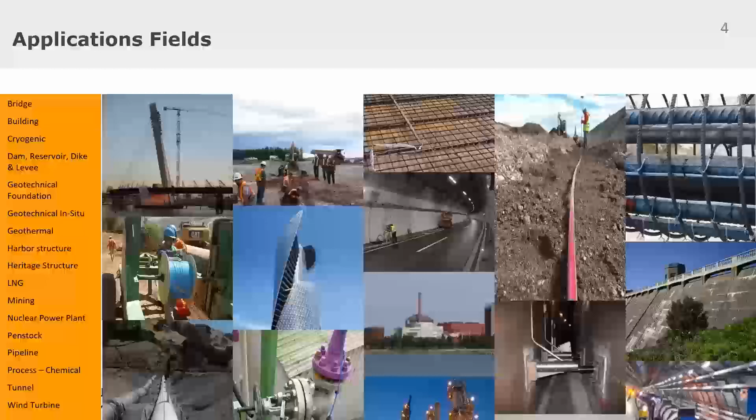Thank you, Olivier, thank you for your introduction. Okay, so let's start with a very brief introduction on structural health monitoring, instrumentation, and sensors.

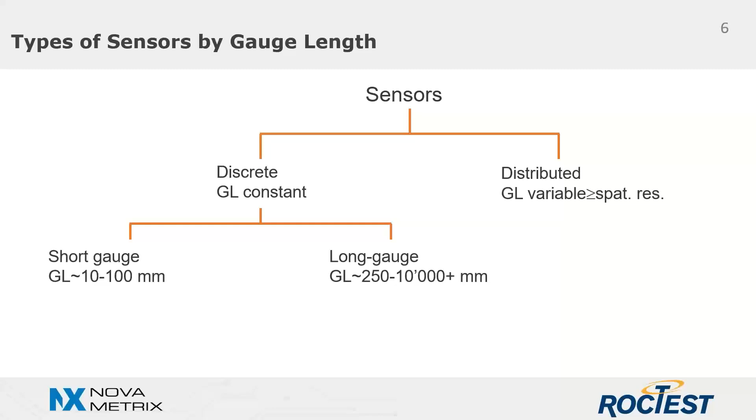So here we can see the types of sensors by gauge length. Sensors are classified as discrete sensors with constant gauge length, and distributed sensors with variable gauge length, which are typically based on distributed fiber optic sensing. Discrete sensors are divided between short gauge, with a typical length from 10 to 100 millimeters, and long gauge deformation sensors, with a length from 25 centimeters to 10 meters.

Distributed sensors can be based on Brillouin scattering technology for strain and temperature analysis along the fiber, Raman scattering technology for temperature only, and finally Rayleigh scattering for acoustic analysis along the optical fiber.

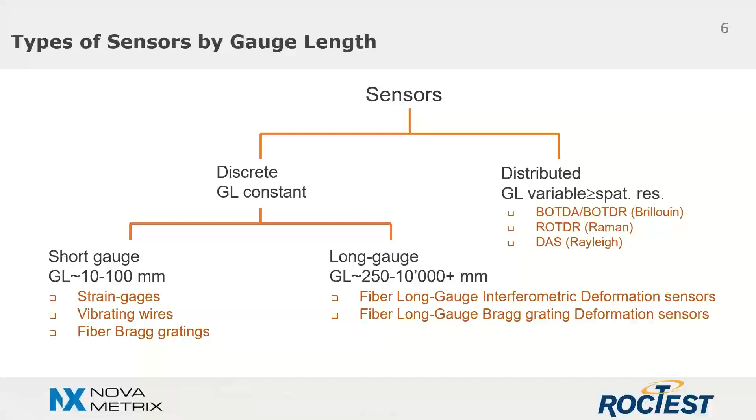Long gauge deformation sensors, all fiber optic, are based on the interferometric principle or Bragg grating, while short gauge sensors are typically electrical strain gauges, vibrating wires, and also fiber optic Bragg gratings and Fabry-Perot cavity sensors.

So here we can see the different long gauge deformation sensor topologies. On the left, we see a simple topology, which consists of one single sensor installed in the direction of the expected strain. It is mainly used for monitoring linear structure elements like beams, which are subject to axial compression or traction, like, for example, piles and columns.

Here in the center, we can see a parallel topology, which consists of two parallel sensors with equal gauge length, installed at different levels of the structural element cross-section. The parallel topology is used for monitoring portions of the structure which are subject to bending.

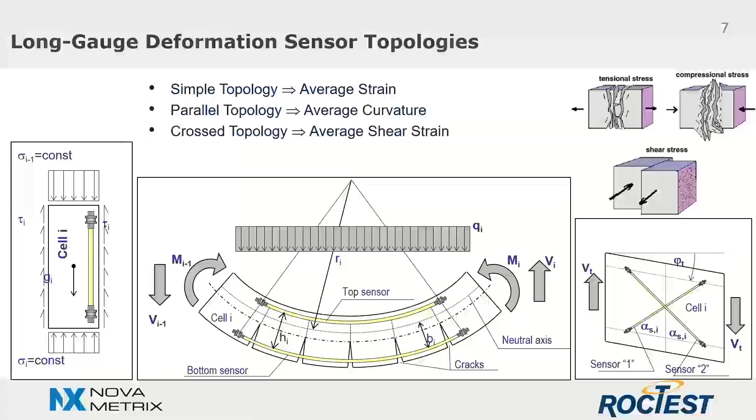Here on the right, we can see the cross topology, which consists of two cross sensors installed with a predefined angle with respect to the direction of the strain line. The aim of this topology is to detect and quantify shear strain.

The main advantage of using long gauge deformation sensors is given by the averaging of the strain over a long measurement basis. Long gauge sensors are not influenced by local material discontinuities, such as cracks, joints, air pockets, and inclusions that are typical of concrete. The measurements contain information related to the global structural behavior, not the local material behavior typically provided by short gauge sensors. The information provided with long gauge sensors is therefore more representative of the global condition of the entire structure.

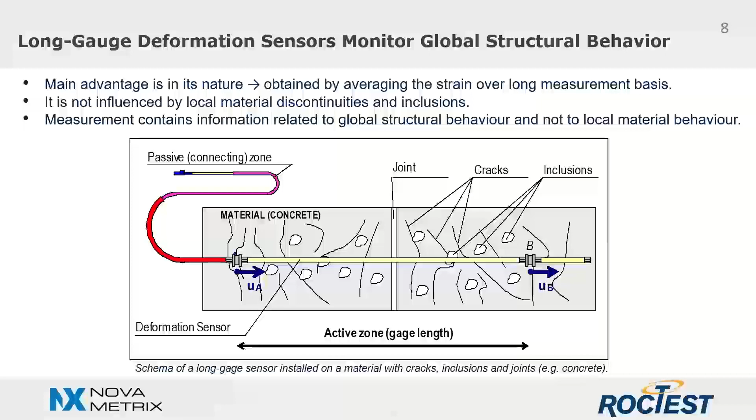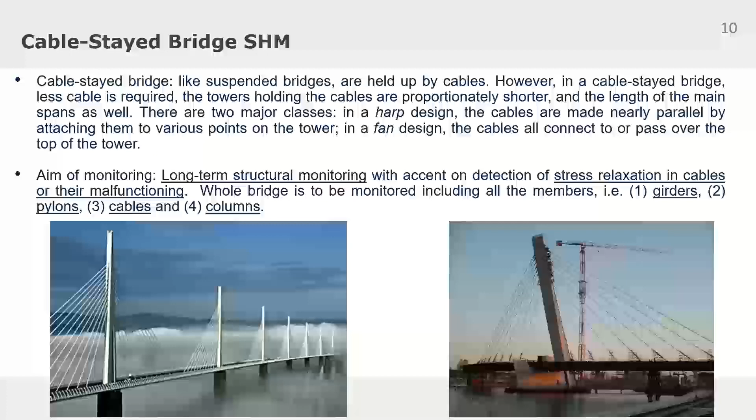Now let me give you a few bridge monitoring examples by bridge topology, and we can start with a cable-stayed bridge. The monitoring purpose for cable-stayed bridges is long-term structural monitoring, with particular attention on detecting relaxation of stress in the cables and their malfunction. The entire bridge is to be monitored, including all members such as the girders, the pylons, cables, and columns.

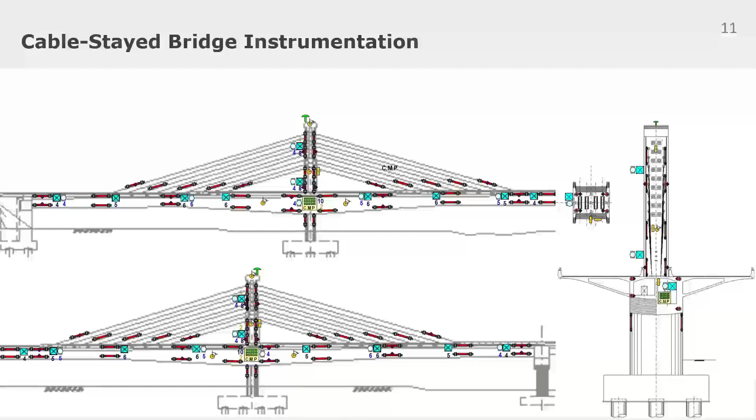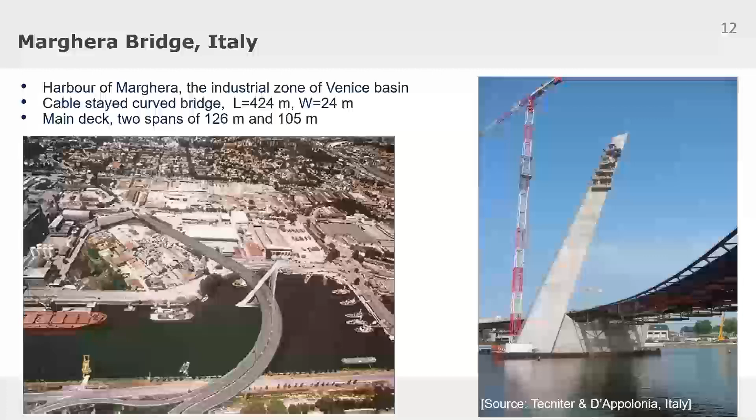Okay, here we have an example of a cable stayed bridge. This is the Marghera cable stayed bridge, located in the industrial area of Venice in Italy. The structure consists of 2 spans with a total length of 424 meters, and this bridge has the particularity of being a curved cable stayed bridge, which resulted in a complex design, and the monitoring system was very important to verify the design assumptions and also to monitor during the entire service life.

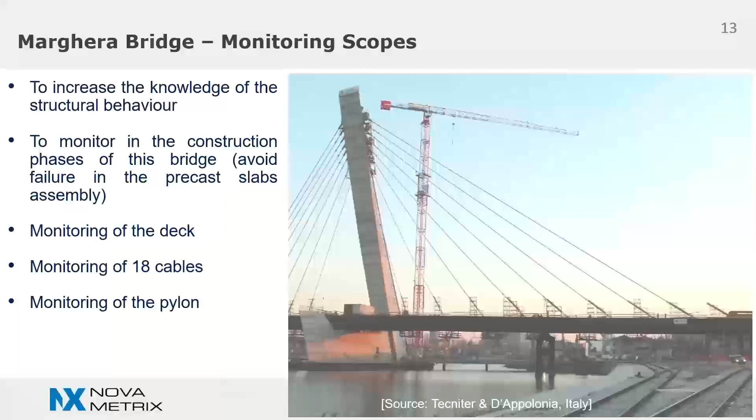So the sensors were installed during construction in order to have control over the most significant construction phases of the bridge, and totally 48 long gauge sensors, together with 4 inclinometers and 24 temperature sensors, were mounted on the 2 spans of the bridge. Each of the 18 cables was instrumented with a sensor, and the 12 sensors of 7-meter gauge length were embedded in the pylon.

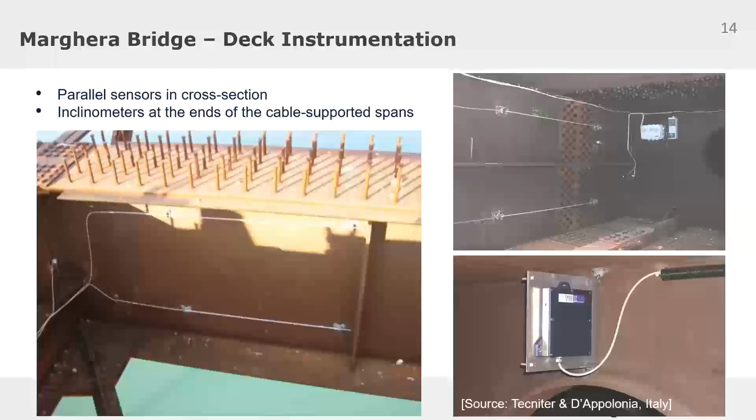Here we can see parallel sensors affixed onto the girder web, and the inclinometers were installed at the ends of the spans to measure rotations in the longitudinal plane of the bridge.

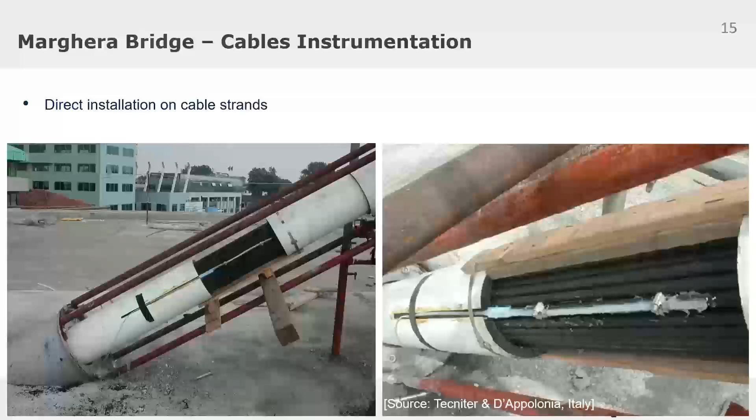Here the deformation sensor of base length 25 centimeters was installed on the strand of each stay cable to monitor strain variation of each cable and to detect anomalies that may indicate malfunction. The sensors were easily affixed directly on the strand using steel clamps, and the protecting coating was restored after sensor installation.

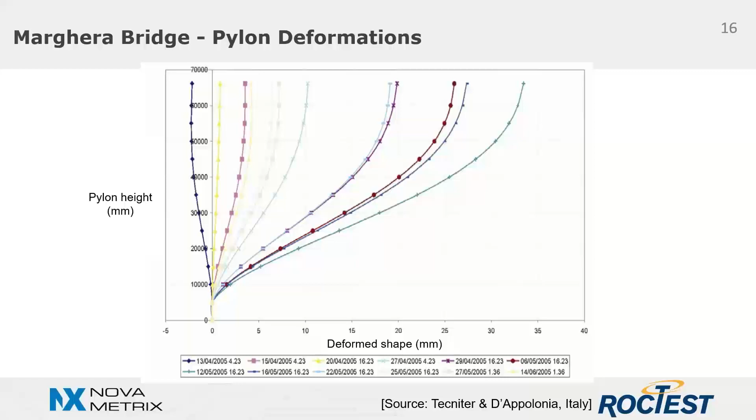For information, the total cost of the monitoring system of this bridge, including installation, was of the order of 1.75% of the total construction cost of the bridge.

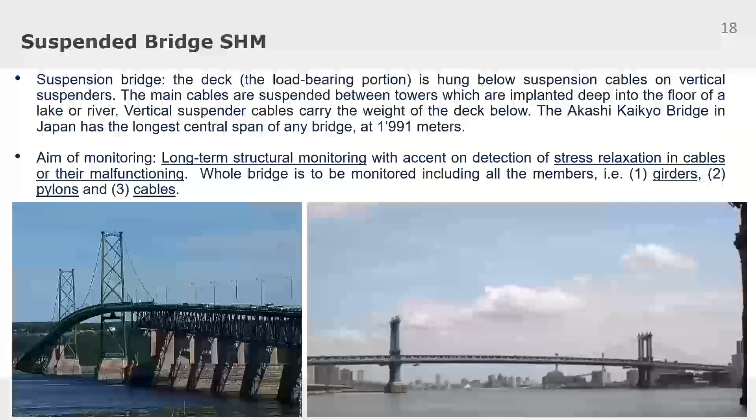Okay, let's see now another bridge, the suspended bridge. The monitoring aim of suspended bridges is still long-term structural monitoring, but with particular attention on the detection of stress relaxation in cables and their malfunction. So the whole bridge is to be monitored, including all members like the deck, the pylons, and the cables.

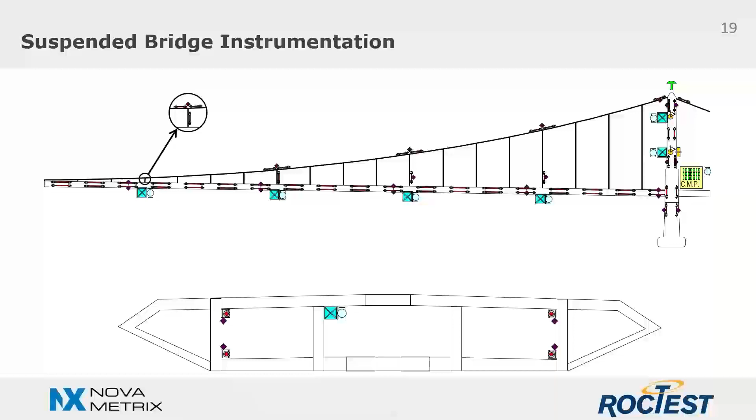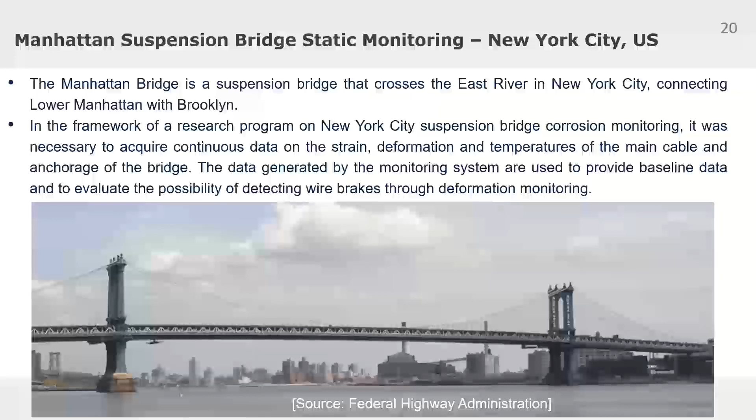Right, this is an example of a suspension bridge: the Manhattan Bridge in New York. This monitoring project came up in the framework of a research program on the corrosion monitoring of suspension bridges in New York City. It was necessary to acquire continuous data on the strain and temperatures of the main cable and provide a baseline to evaluate the possibility of wire breakage.

So 6 long gauge deformation sensors of 6 meters were installed on the main cable, and 2 Bragg grating strain sensors were installed on the anchors on individual strands.

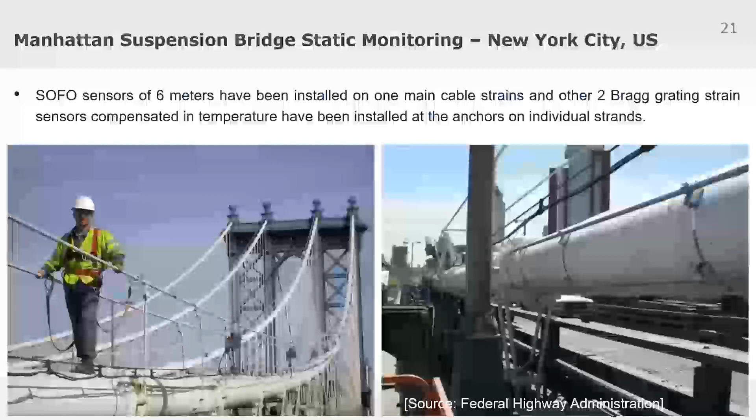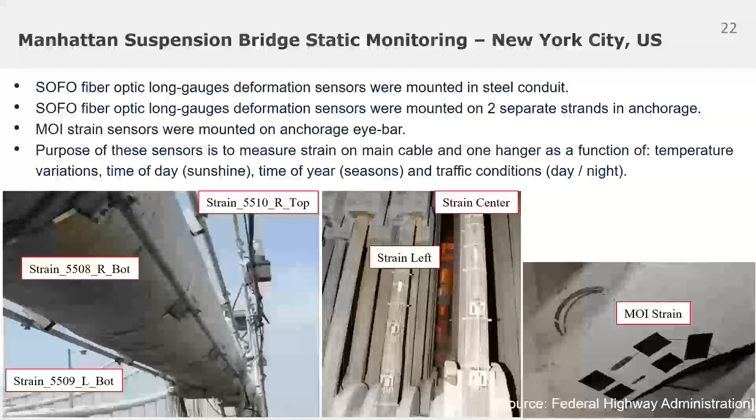The purpose of these sensors is to measure strain on the main cable and on one hanger as a function of temperature variations, daily and seasonal variations, and traffic conditions.

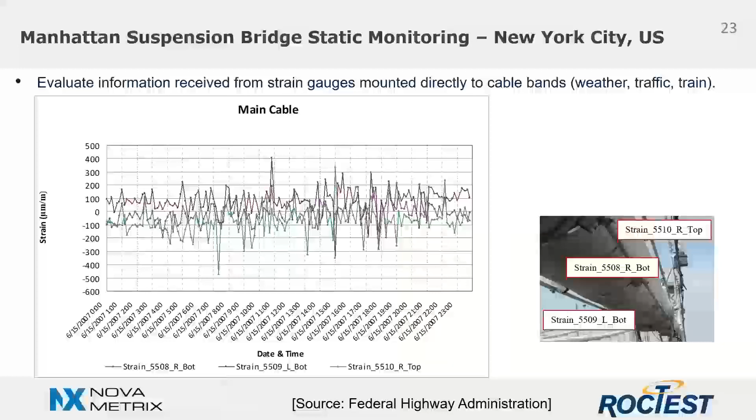Here we can see the strain evolution versus time of the 3 sensors mounted on the suspended cable. What you can notice is that the stress generated on the cable is less during the night and increases during the day, and the peaks we see here are most likely heavy trucks detected when passing over the bridge.

Now we can see another type of bridge, the arch bridge. The monitoring purpose is again the whole lifespan monitoring, including the concrete early age and all the critical phases of the construction of the bridge.

The load test of the bridge also has to be monitored, and during service, any change in the deformed shape of the arch due to load or due to rheologic phenomena like creep, concrete shrinkage, and cracking also have to be controlled and monitored.

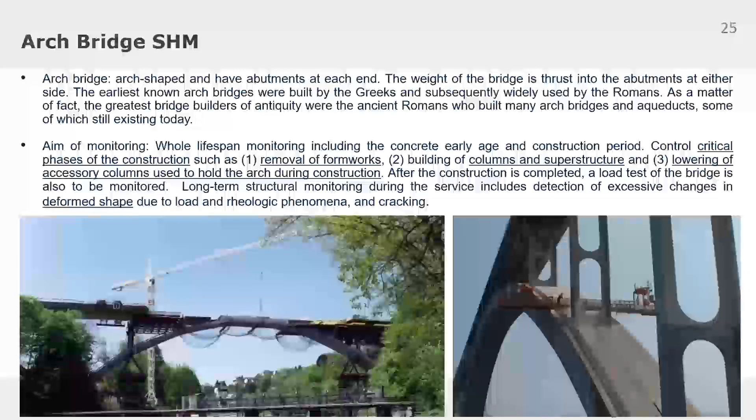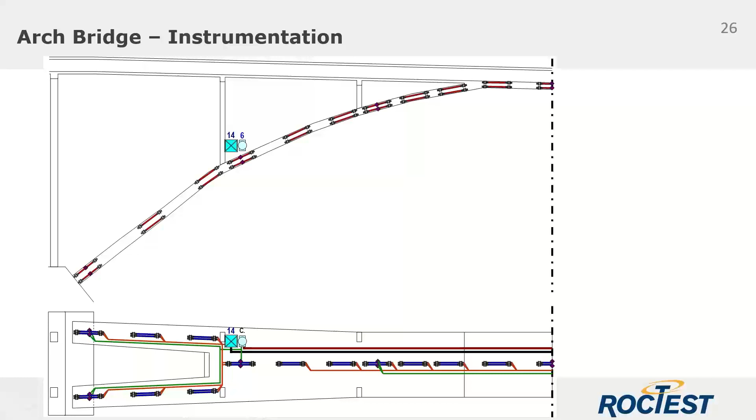Here we can see the same instrumentation on the other part of the bridge.

Here is an example of an arch bridge: the Siggenthal bridge, a concrete arch bridge built over the Limmat River close to Zurich in Switzerland. Structural monitoring has been carried out since the completion of the construction of the bridge, but in particular during the different construction phases.

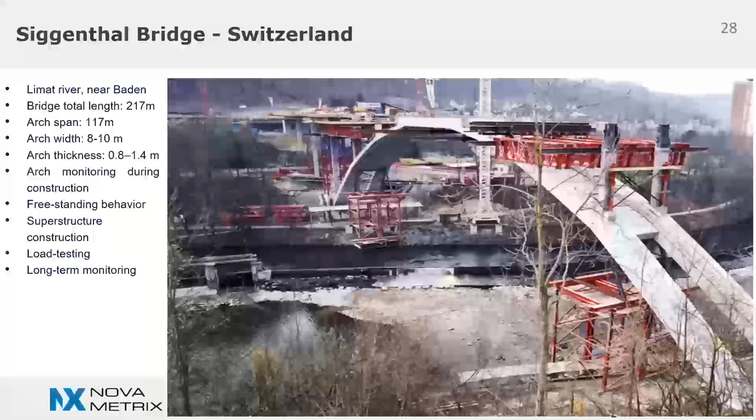The monitoring aim at the time of construction was to monitor the local concrete deformations, to measure the local curvatures in the vertical plane, and to calculate the perpendicular displacement of the arch by double integration of the given curvature in each cell of parallel sensor that you can see here.

The method for how to calculate the deformed shape of a beam.

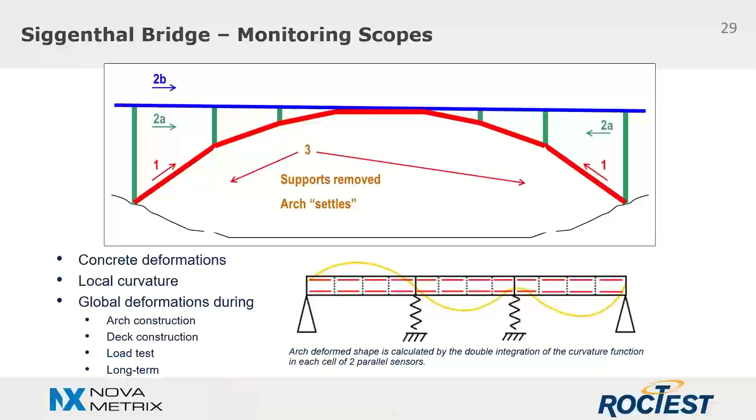The bridge is now instrumented with 58 long gauge deformation sensors, 2 inclinometers, and 8 temperature sensors. Pairs of parallel sensors were embedded in concrete parallel to the arch axis, which is a usual methodology.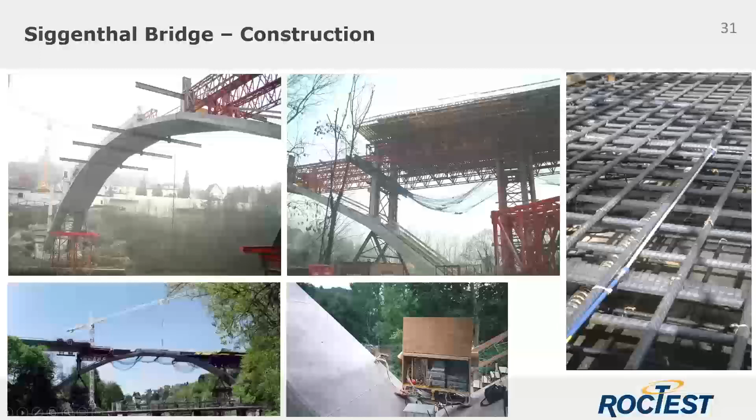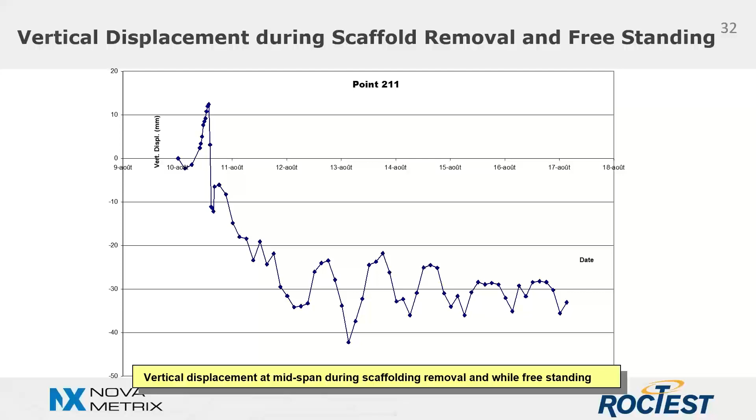Here it is also possible to see the different lowering phases and the periodic movement due to daily temperature variations. It's also interesting to notice that the vertical displacements due to the dead load of the arch are of the same order of magnitude as the daily movements due to daily temperature variations.

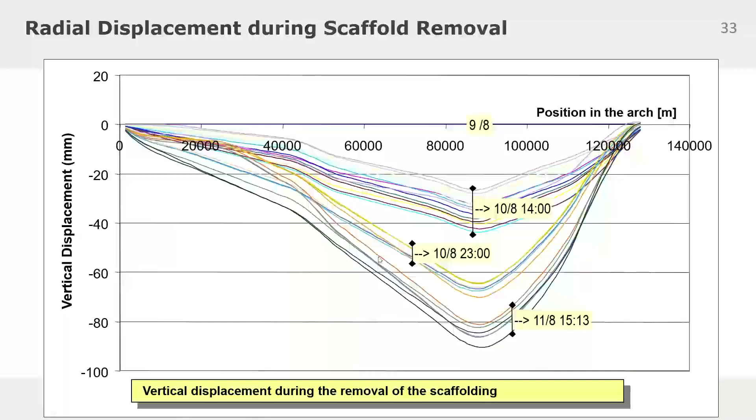Now, finally, this is the last example, the beam bridge, which is a more simple bridge.

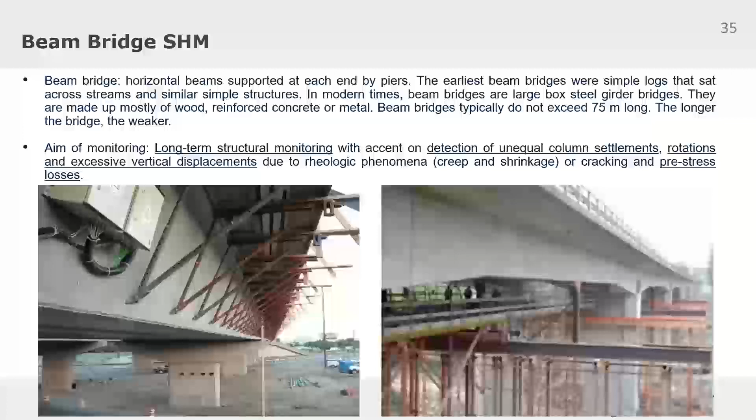The monitoring aim is again long-term structural monitoring. I always stress on this because it's very important for the integrity of the structure, with particular attention on the detection of unequal column settlements, rotations, and excessive vertical displacements due to creep and shrinkage in concrete, cracking, and pre-stress losses in the concrete.

Also here, a parallel sensor topology is recommended, which allows the calculation of the deformed shape using the double integration of the curvature function in each cell.

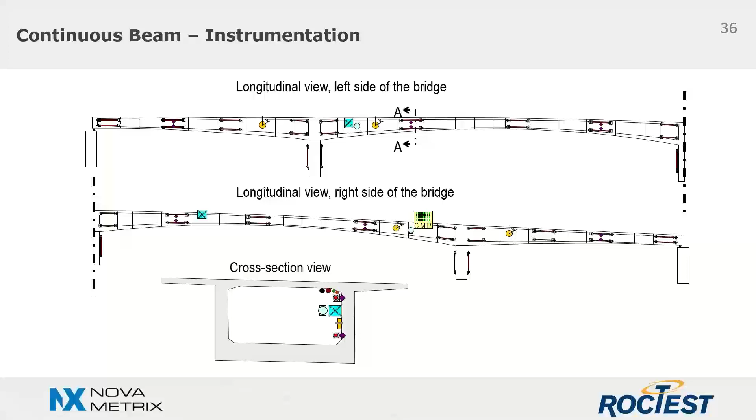Possible unequal settlements of the columns, cracking, or rheologic phenomena will change the deformed shapes of the beam and the vertical displacement distribution, and the redistribution of the load will generate a change in the strain in the columns. Since the deformed shape of the bridge and its vertical displacement distribution are known, it will be easy to identify the sources of the structural malfunction.

Okay, here we have an example of a beam bridge. This is the South Perimeter Bridge in Winnipeg, Canada. It's a steel girder bridge that has recently been instrumented to continuously monitor for overloading, fatigue, and cracking due to increasing traffic and corrosion in the steel girder.

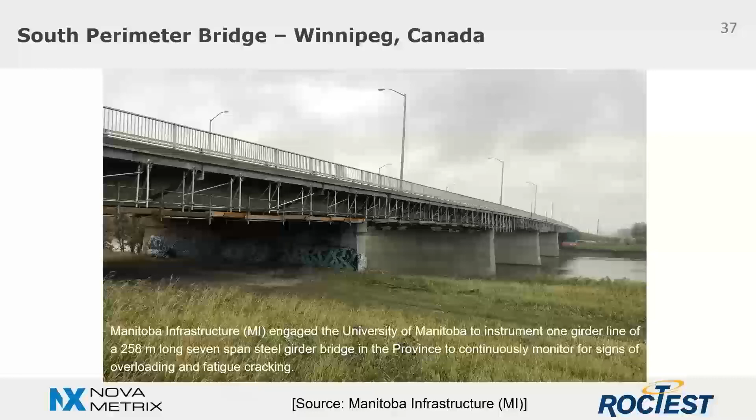So the client selected a distributed fiber optic system in order to localize and quantify abnormal strain and cracks every meter along an optical sensing cable. This is the selected SMARTape strain sensor, in which two fibers are embedded in a composite thermoplastic tape with fiberglass reinforcement. The sensor is very thin and very suitable to be glued on flat surface of metal.

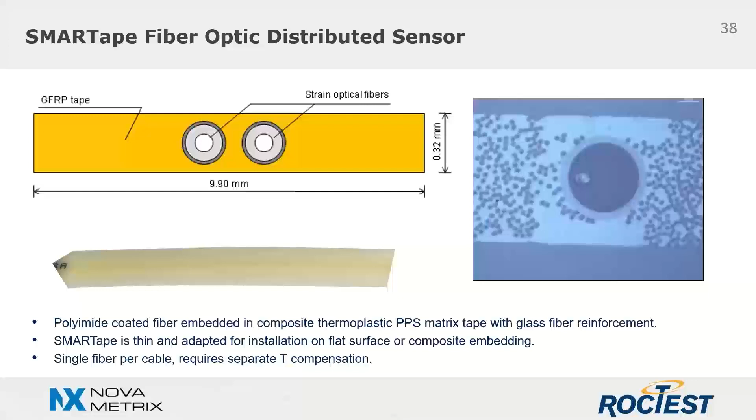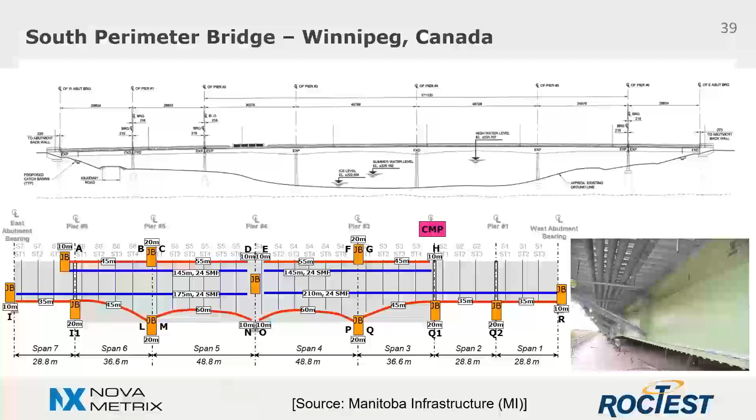What you can see here is the lateral view of the strain sensor installation. The sensor was installed on the lower and upper part of the girder. The junction boxes that you see here were requested by the client in order to keep sufficient cable over length to be used for immediate cable repair on the bridge. And the blue cable is a temperature and transmission cable to compensate the temperature on the strain cable.

Okay, here we can see the strain sensor installation. The surface needed to be clean, and the sensor was glued directly on the paint. After bonding the sensor on the paint, the sensor was protected using a special tape for humidity and impact protection.

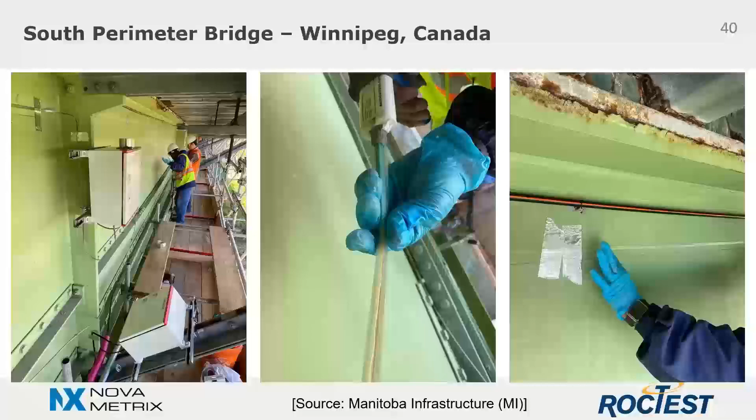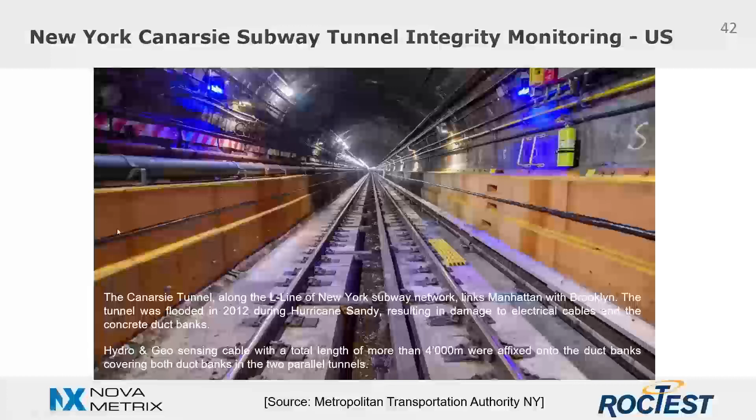And then finally, we also have an example on tunnel. This is the Canarsie tunnel along the L line of the New York subway, which links Manhattan with Brooklyn. In 2012, this tunnel was flooded during Hurricane Sandy, resulting in damage of the concrete banks that you can see here on the two sides. More than 4 kilometers of strain sensing cable were affixed onto the banks, covering both banks in the two parallel tunnels.

So early abnormal strains that could induce a collapse of the banks on the train track are now detected by this monitoring system, which automatically triggers an alarm to stop the train traffic and allows visual inspection inside the tunnel.

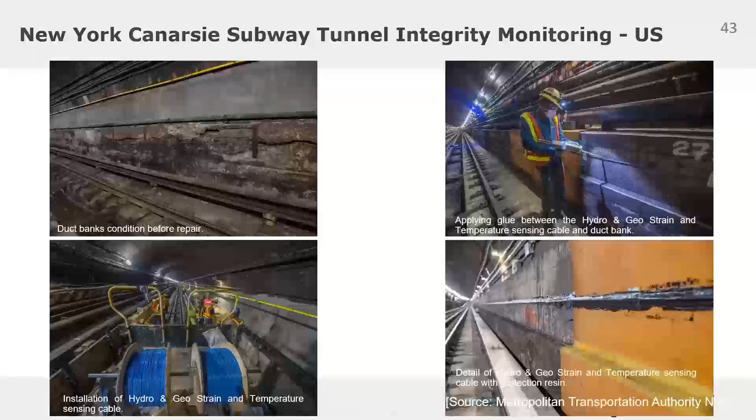Okay, well, thank you very much for your attention.